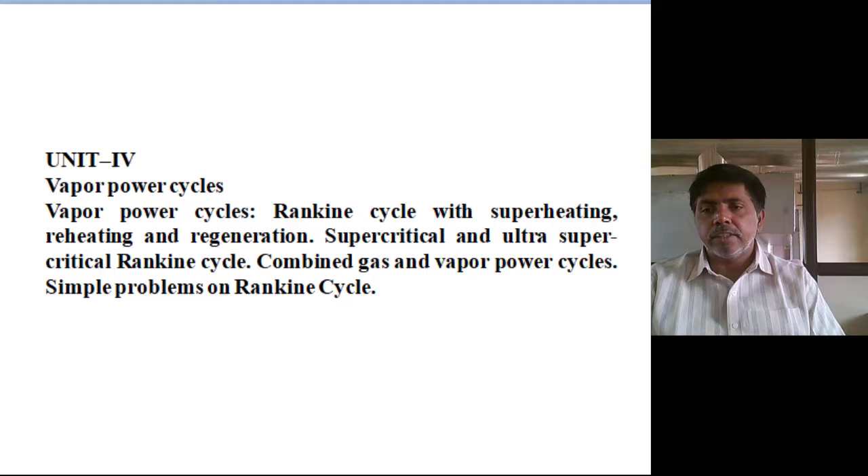Then one more option: from the pollution point of view, efficiency is required. With efficiency, pollution is also our concern. Then we combine the air standard Brayton cycle and the vapor power cycle, and we get the combined cycle steam power plant. Simple problems on the Rankine cycle we discuss. This is the brief introduction of the unit, what we are discussing in the next 6 to 7 classes.

For that, pure substance property extraction at the given temperature and pressure is required for simple calculations. Then the Mollier diagram is a major chart. In this Mollier diagram, this is called the saturation curve. Below the saturation curve, pressure lines and temperature lines have the same slope. After the saturation curve, temperature lines deviate their slope from the pressure lines.

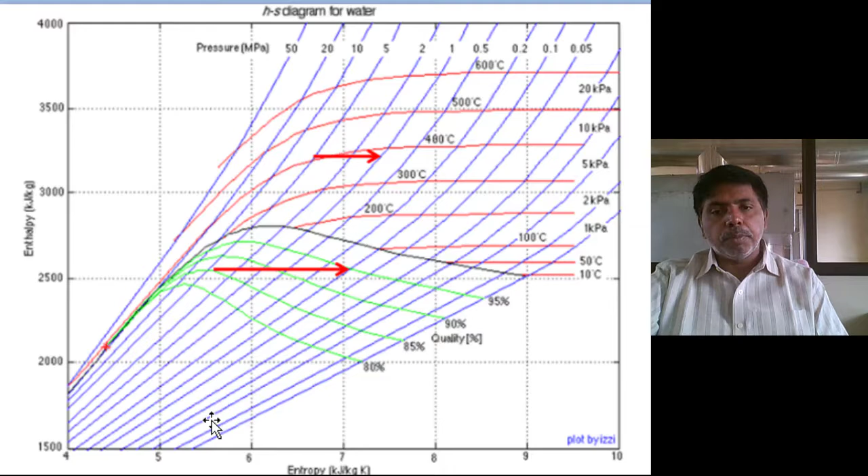And below the saturation curve, this is the dryness fraction: how much dryness is there in the wet steam, 95%, 90%, 85%. The vertical axis represents specific enthalpy, the horizontal axis represents specific entropy.

Now move to the demand part: what is the necessity of study? At present, this is 31-8-2020, maybe due to COVID only 1 to 2% capacity rise. The installed capacity of thermal power plants is 62 percent out of 3,72,693 megawatts. Now, the automobile industry has not started utilizing electrical motors as prime mover instead of internal combustion engines, only a minimum 0.001 percent initiated.

For full-fledged utilization in the automobile industry, electrical motors as a prime mover, the remaining automobile is not changing. Transmission system, everything is the same. Only the prime mover is replacing the internal combustion engine, from the pollution point of view and pollution norms. Before that itself, out of 3,72,693 megawatt capacity, 62% is thermal power plants, only Rankine cycle.

Gas power plants mean combined cycle power plants. There also the Brayton cycle is there, but no doubt the Rankine cycle is mandatory, otherwise you will not get efficiency. The remaining 38 percent is renewable energy, hydro, nuclear, whatever. But 62 percent Rankine cycle means, especially for mechanical students, a huge future is there.

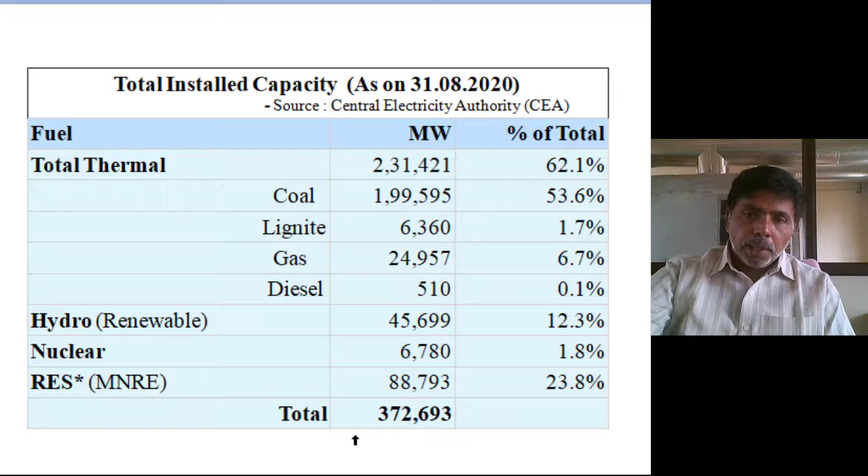Next, straightforward, we'll move to the importance. This much of importance is there. First, we move to the Carnot cycle.

In vapor power cycles, if I placed the Carnot cycle, then is it practically feasible or not? If it is feasible, very good, the highest efficiencies you will get. If it is not feasible, then what are the modifications we are making for the feasibility of the Carnot vapor cycle?

The Carnot cycle all know. Heat transfer will take place by isothermal process. So the Carnot cycle contains heat transfer in isothermal process. Why? Because in isothermal process, whatever heat you are supplying, total heat will convert as work. There is no loss. Total conversion is taking place. That's why heat transfer is in isothermal process.

Work done in adiabatic process. In adiabatic process, the main advantage is there is no heat loss to the environment. Whatever internal energy is there, total internal energy will convert as work. Q is 0. So work interactions in adiabatic process, heat interactions in isothermal. This is Carnot. Anywhere, Carnot air standard cycle or Carnot vapor cycle, the processes are not changing.

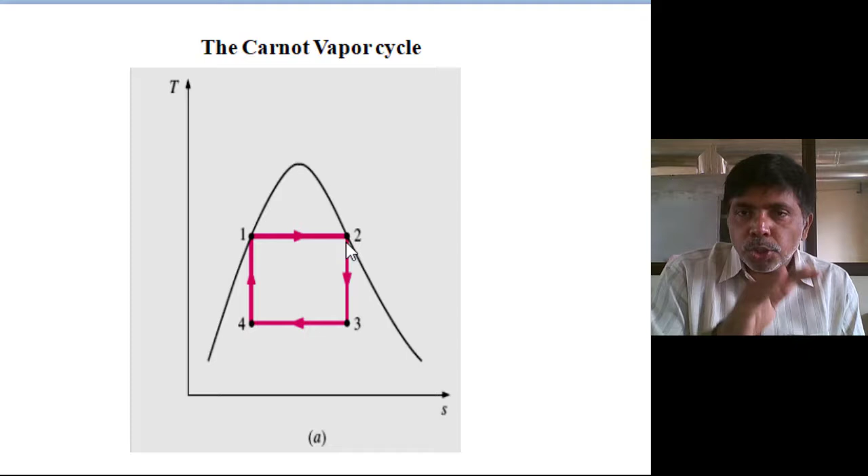If we are operating in phase change mode, maximum 220 bar pressure, and at that 220 bar pressure the saturation temperature is 374 degrees. So above 374 degrees we are unable to follow the isothermal process. So for isothermal heat addition, the maximum temperature limit is 374.

There is an efficiency limit. We can't move beyond that efficiency, with fixed 374 and ambient 40 degrees. Whatever efficiency we are getting, that is the maximum possible efficiency by the Carnot cycle. Very less efficiency we are getting.

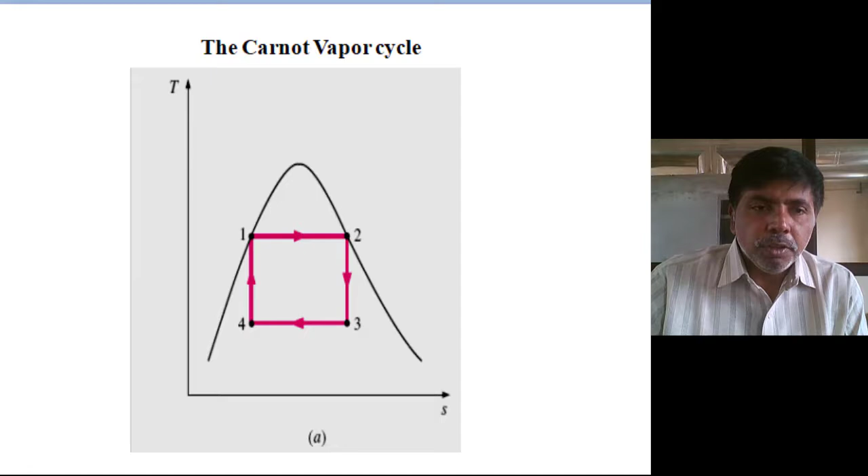To eliminate that one, that is the first hurdle. Coming to the second, to overcome 2 to 3, I already mentioned two-phase expansion. While two-phase expansion is taking place, after forming of the water droplets, the water droplets impinge on the turbine blades and cause damage to the turbine blades. To overcome that one, we will move to the second option.

Raise the boiler pressure to the supercritical condition. Then the expansion process in the turbine is from fully superheated steam to the saturation state. The full expansion of steam is from superheated to saturated only. So it is a good operation. But what is the major drawback for this?

Isothermal heat addition is practically not possible. In this condition, isothermal heat addition is practically not possible, because it is a single-phase system. While you are supplying heat, automatically the temperature is rising. So isothermal heat addition is practically not possible. So pure Carnot cycle implementation is practically not possible. We want to modify the process.

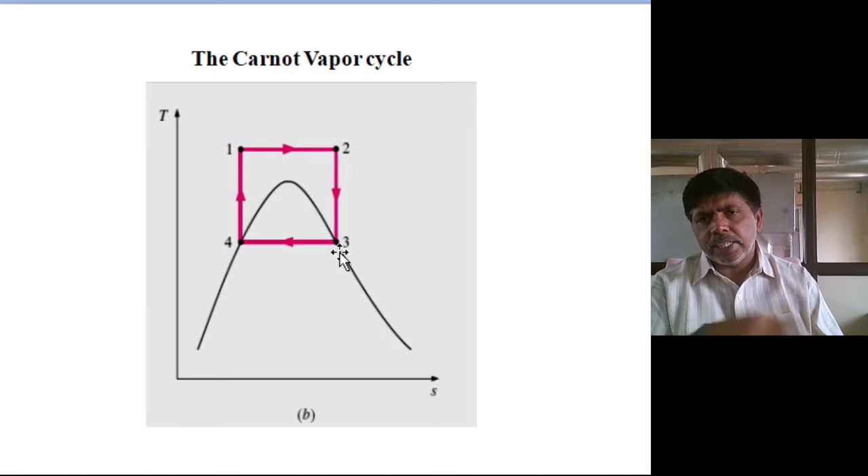What are the processes we want to modify? The heat addition and heat rejection will move to constant pressure processes. The compression and expansion will be put in reversible adiabatic, or isentropic, processes, because all processes are reversible. Our cycle's first assumption is reversible.

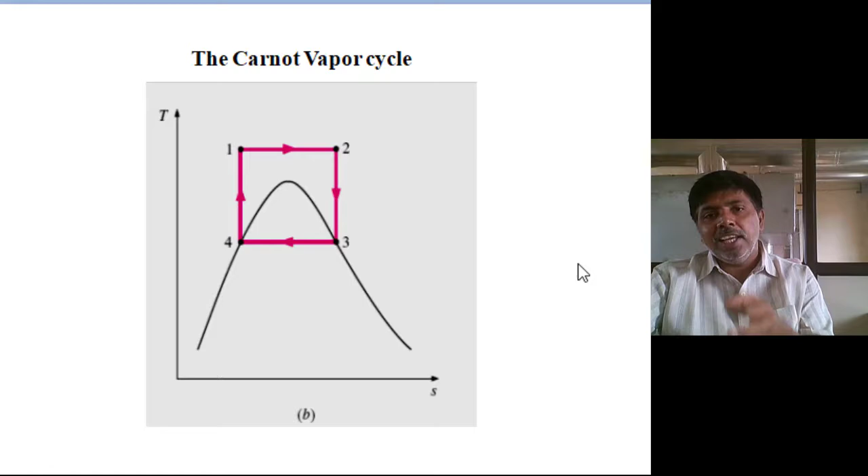So replace the isothermal process by a constant pressure process. Then the cycle will execute. Single phase expansion will come, single phase compression will come, constant pressure heat addition and constant pressure heat rejection are coming. So that is the one modification we made for the feasibility of the substitute of the Carnot vapor cycle. That modified cycle is the Rankine cycle.

We'll solve one small problem, then you'll get a small idea on the Carnot cycle. Then tomorrow's class we'll discuss the simple Rankine cycle. The first example: consider a steam power plant operating on the simple ideal Carnot vapor cycle. Steam enters the turbine at 3 megapascal and 350 degrees centigrade and is condensed in the condenser at a pressure of 75 kilopascal and 92 degrees centigrade.

So steam enters the turbine at 3 megapascal. Generally in a problem they give SI units, megapascal and kilopascal. For the Carnot cycle we don't need to extract the properties, but in the general case we extract properties from the steam table. In the steam table, pressure is denoted in bars. 1 bar equals 10 power 5 Newton per meter square. 1 megapascal equals 10 power 6 Newton per meter square. So megapascal to bars means multiply by 10.

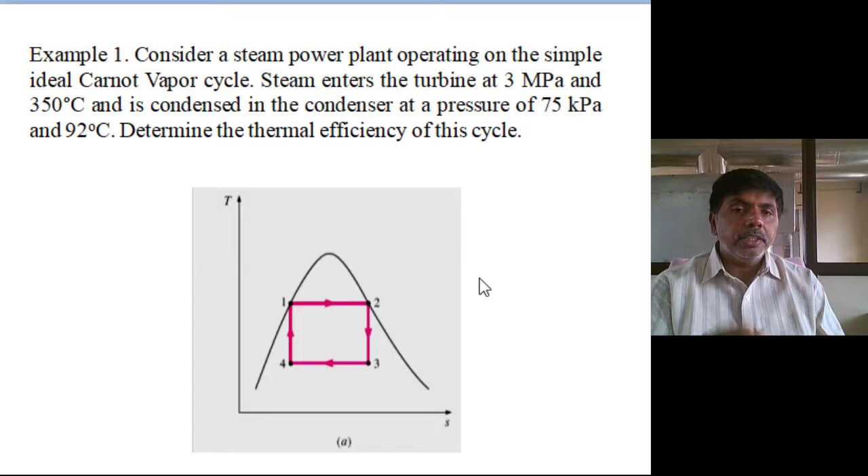For the Carnot cycle it's not required, because the Carnot cycle efficiency depends on the temperatures, not the medium. So 3 megapascal and 350 degrees centigrade, condensed at 75 kilopascal and 92 degrees centigrade. Determine the efficiency of the Carnot cycle. Thermal efficiency is heat supply minus heat rejection by heat supply, or net work output by heat supply. Heat transfer is directly proportional to temperature, so 1 minus T2 by T1. T2 is 92 plus 273, 365 Kelvin. T1 is 350 plus 273, 623 Kelvin.

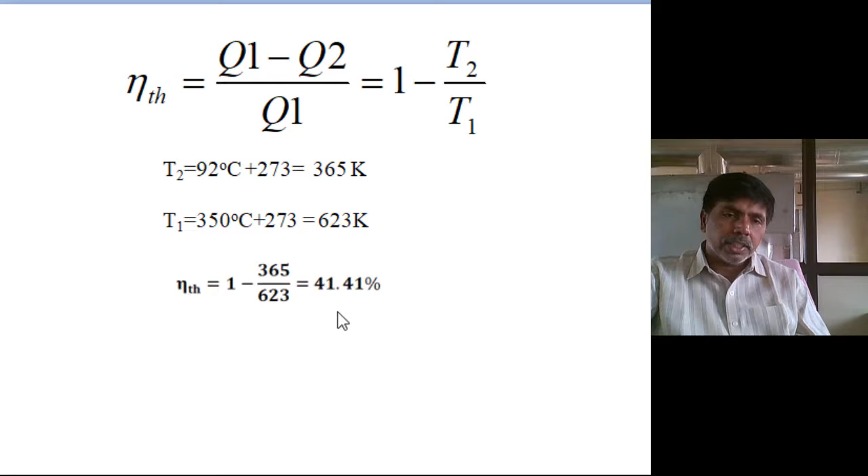We know the source temperature and the sink temperature, so determine the thermal efficiency of the Carnot cycle. If the Carnot cycle runs between these two temperature limits, the possible efficiency is 41.41 percent. Practically it is not possible, because the Carnot cycle itself is practically not feasible, but this is a benchmark efficiency. Whatever vapor power cycles we substitute, their efficiency is compulsorily less than this, because we can't get real cycle efficiency more than imaginary cycle efficiency. So next class we will start the Rankine cycle.